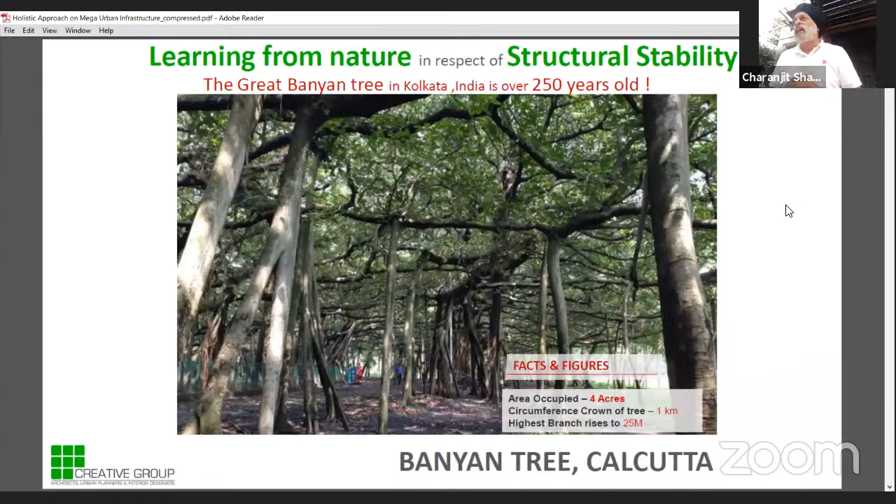Next, can you put the next one? We need to learn from nature - everything is in nature. Unless I do the adoration with nature, love with nature, understand nature, human psychology has to rotate around nature. You see the structure, the banyan tree in Calcutta, which is also integrating the structure - the beam, the philosophy of the structure is totally clear in this. Next. So this is now, respect my resources.

Today, sadly, I have to respect my water, air, earth, sun. Most things are now getting polluted. Why? We have air pollution, water pollution, all these pollutions coming, and that is what we call industrial growth, or development. Perhaps that is what is happening. We need to be conscious about that.

So now, this is mostly what we are doing. We are moving from fossil to solar to nuclear to many more things put together. This also has to be seen in terms of how we conserve energy.

It has to go into the nerves of the people, and we understand and act according to that, so that we are conscious about our community, our open spaces, our community spaces, our public spaces.

This is perhaps Chennai Airport, which won the global competition. We had Gensler as our partners from USA, and we were given the domestic terminal. Then we actually went into the site, investigated everything, dug out areas and created a place for the international terminal. Perhaps all of you must know that earlier there was no space for international.

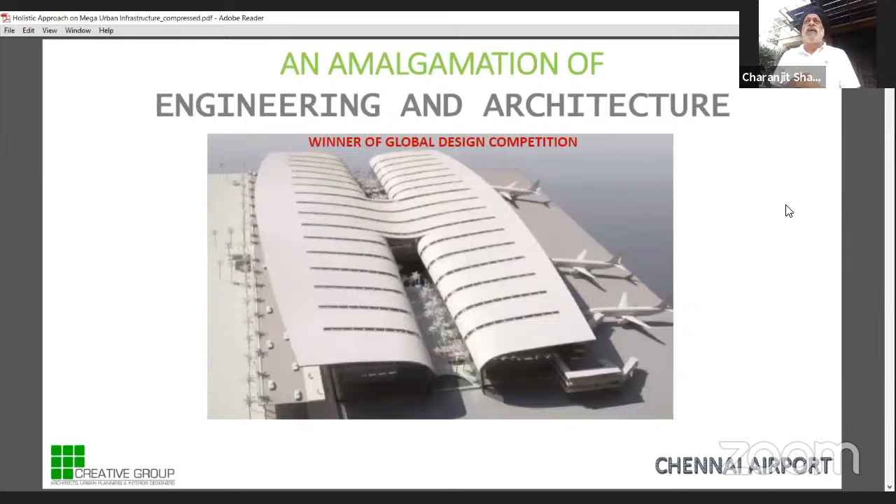We manipulated the whole site in a very intelligent manner and did that. This is how architects are very ambitious in terms of form, and perhaps we want the best form. We were inspired by the bird. We said, okay, let it be like a bird's wing. So we thought, yes, we make an airport terminal as wings of the bird.

So now, once you visualize a form, you need to contemplate what type of function, how to befit the function. Does the form come first or the function come first? No, the form and the function both complement each other, supplement each other, and your mental computer starts rotating, evolving the form and befitting the function.

This is how contemplating through and thinking of a very mega project as a very symbolic, iconic, sustainable, and innovative design. These are the ambitious things every architect, designer, planner would go for, and that is what we tried here.

So this is basically how, today, I'll only stress upon the passive ways of green architecture, sustainable architecture. How do you shape and size the building? How do you really orient the building? How do you place the building? How do you see that you maximize daylight and minimize heat gain into the building?

Besides other innovations, besides other active ways of sensors, automations, mechanical ways, variable drives, and I may call many more engineering terms - and then I say green, no.

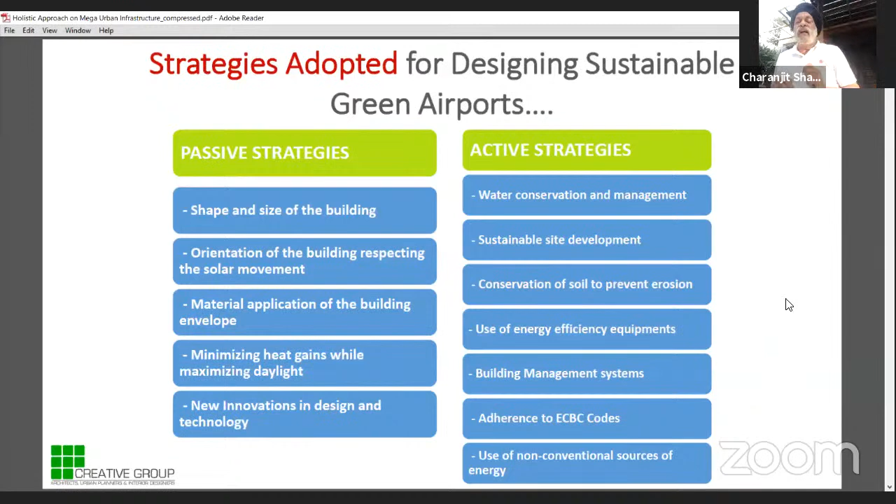These are some of the very innovative features in Chennai. We have the largest cantilever in the world in any airport building, 80 feet, which is 24 meters. And we were the first to bend a 508 half-meter pipe, 16mm thick, in Chennai - that technology was not there before. We also have steam-cured box section precast concrete girders, a technology brought for the first time. I'm happy to share that we can always have global intervention in terms of new technology, but it should not overpower my design philosophy.

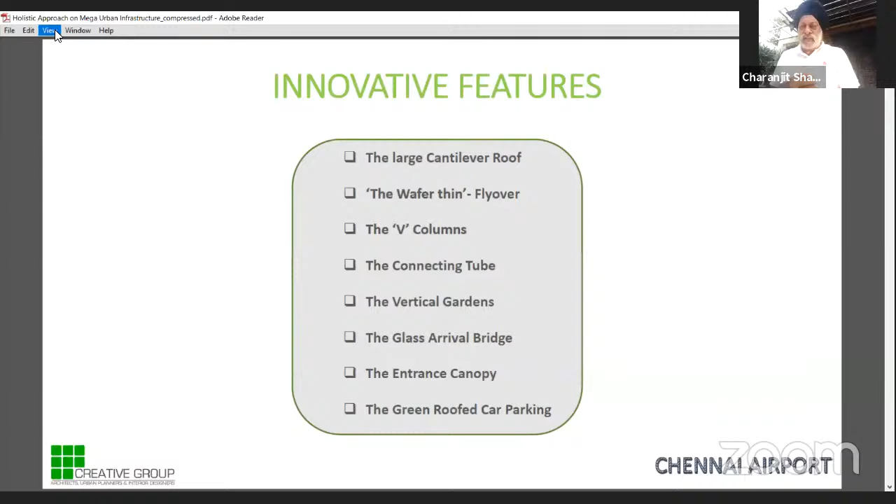This is how we started playing with the design, like an H-shaped building. We tried to see how variables worked in the plan, how the sun is moving - it's a north-south placement. On the air side, the back side, where you see the aerobridges, is the north, with a shade of about 12 meters. In the front, which is south and southwest, there's a cantilever of 24 meters. This is how the sun is cut, giving me a north-south face and a shaded south face to get glare-free light in the terminal.

When this was inaugurated by the Honorable President at 6:30 in the evening, there was no light on in the terminal building - it's an all-day-lit terminal building. This is how we planned it physically so that I conserve energy rather than just putting some glass facade to cut the heated sun. But by cutting the heated sun with shading devices, that is most appropriate.

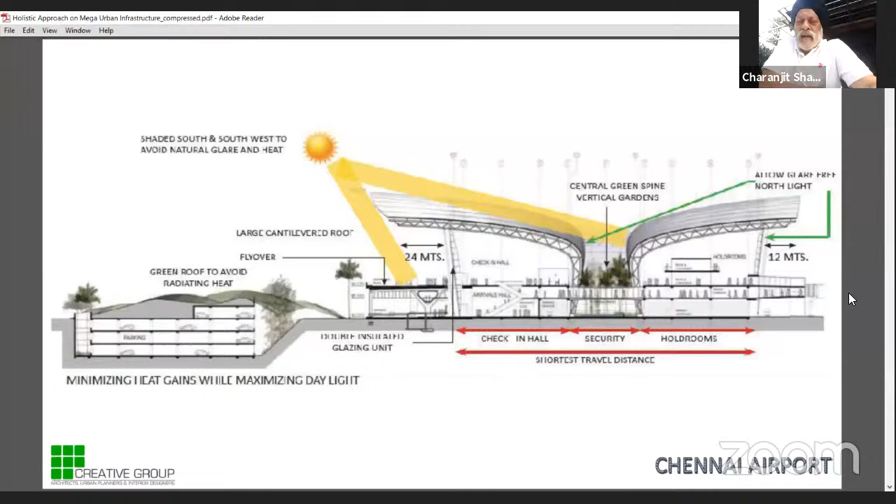This is how we have the vertical gardens in between, and this H-shaped cut gives me one surface here, another surface on the other side, and practically 4 surfaces, then two surfaces for my north and south light. The plate size on one side is about 30 meters, so I get 15 meters from each side of daylight, and it's an absolutely day-lit terminal building.

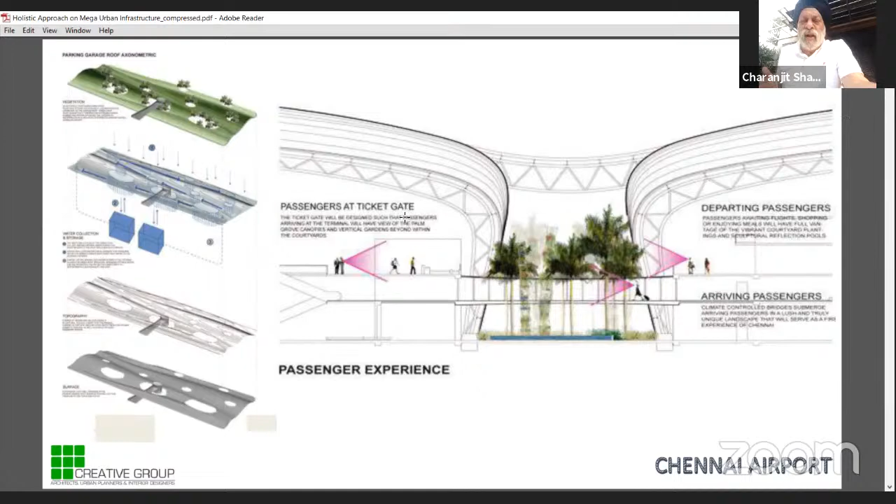This is how we have this arrival tube, so that once I come from the air syndrome, I come to this, I see from the glass on both sides the green, and I am grounded, I am with the green, and my air syndrome is finished.

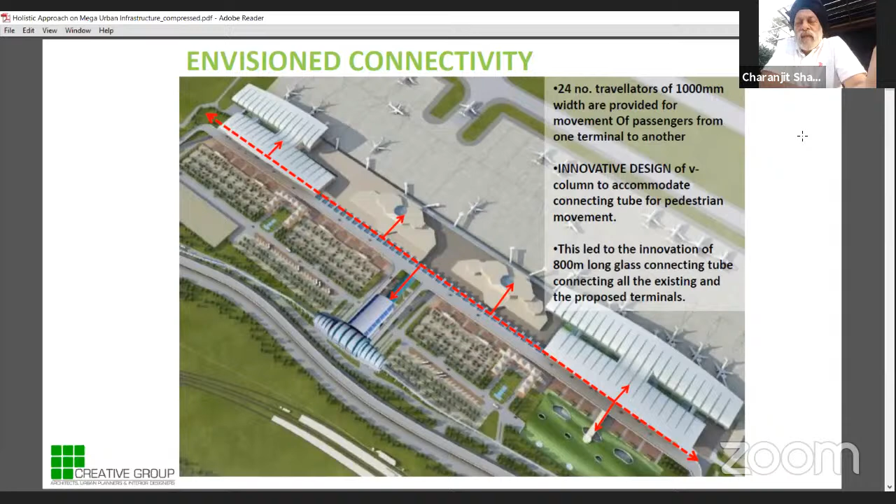This is how there is no place. The airport is practically abutting the highway, and the elevated road we have made in a manner that it is like 2 layers.

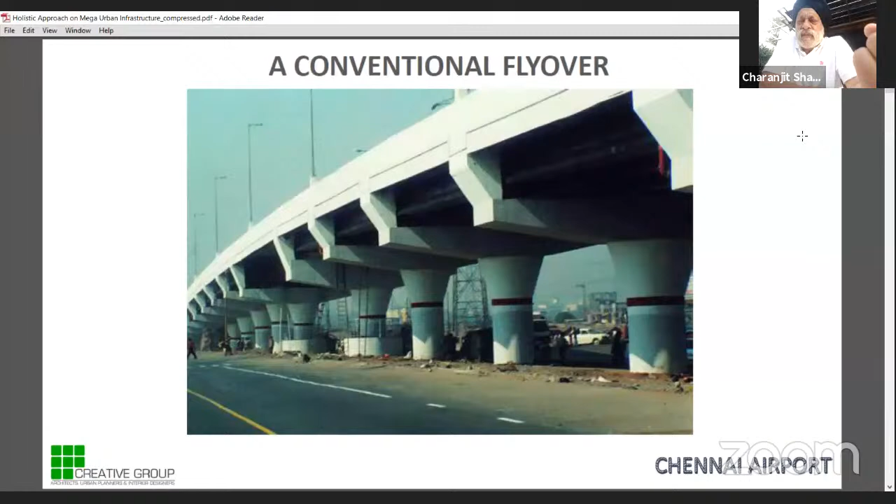This is the V column which we practically innovated. In this V column, we have inserted a glass tube which connects the domestic and international terminal to the metro, to the surface, and to the railway station, which is about 2.5 kilometers all over, and it has about 40 travelators.

This is now under construction. I'm talking about these box section girders.

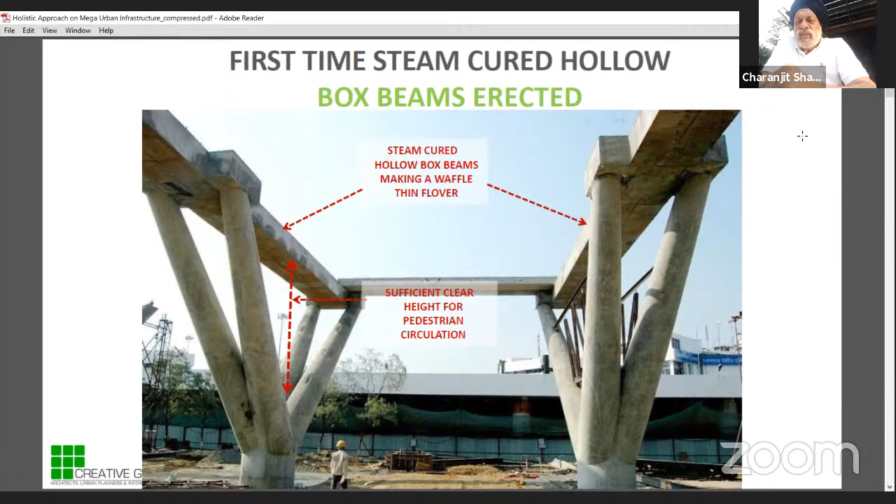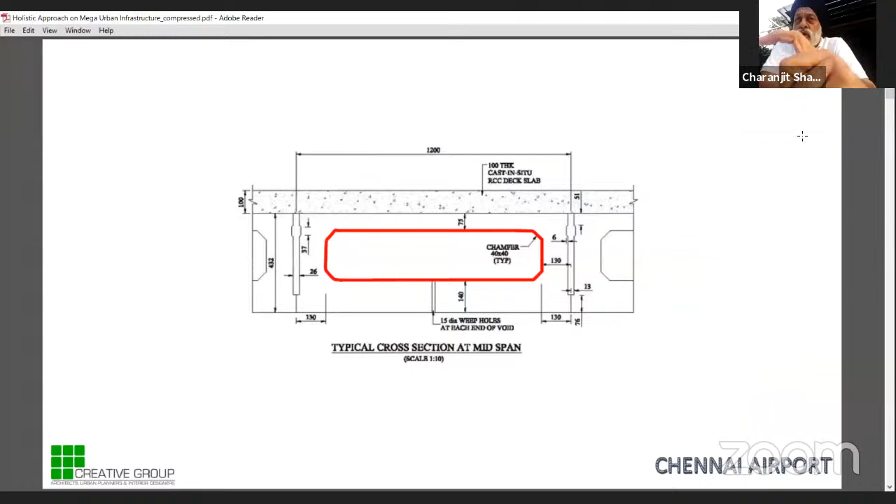The construction was very, very difficult. These are the steam cured box section girders, hollow from inside, waffle thin, just about 80 thick waffle precast steam cured girders, which we innovated and put here to gain more height below the elevated road, to insert another layer, which is a link to my other walkable space, for the pedestrian to move around.

So this is how the V column and the vocabulary of the V column is over. This is the section, I will not go into more details, I have many more things to discuss with you.

This is the V column, inserting the steel tube in between.

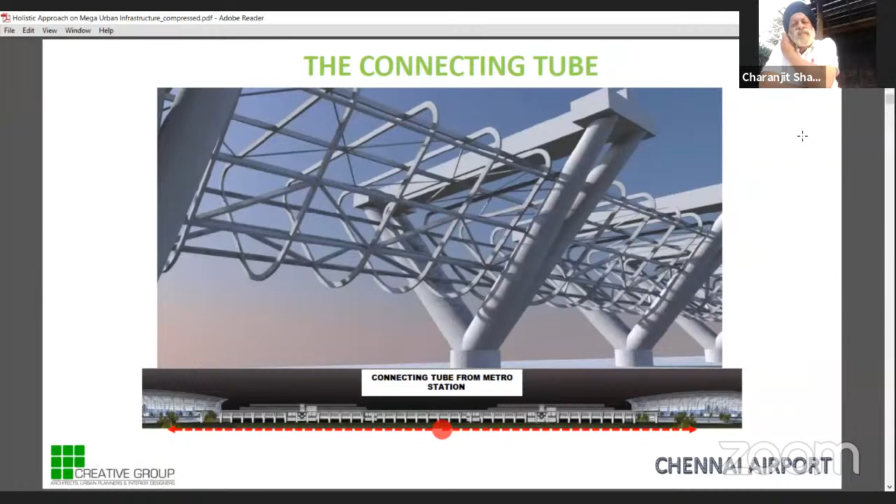This is how, most of you must be aware of, the glass tube works.

This is you as an architect, this is how the tube works. As an architect, you have to really dig out areas of no areas. So today is the time when either we use the skyscape, you have the upper level surfaces where you generate, or you go underground. How do you see that the ground is left for pedestrian movement and for the green?

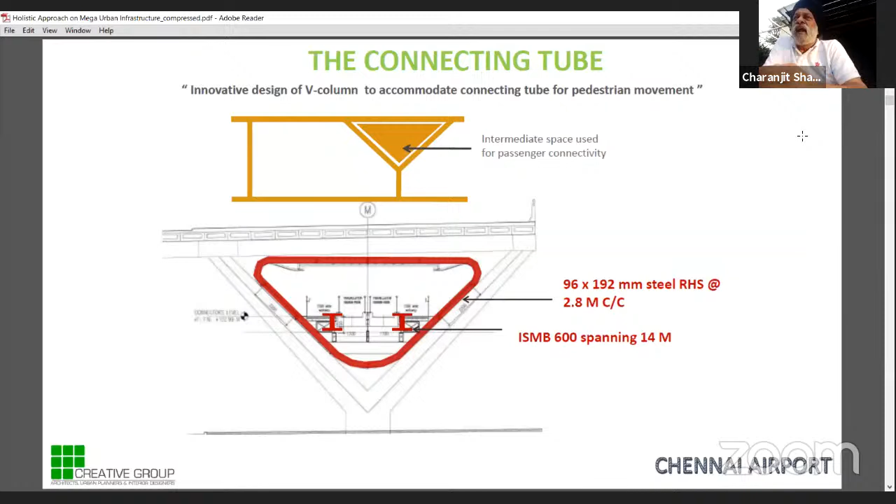This is the glass tube, and this is how it is continued. And this is again a glass tube.

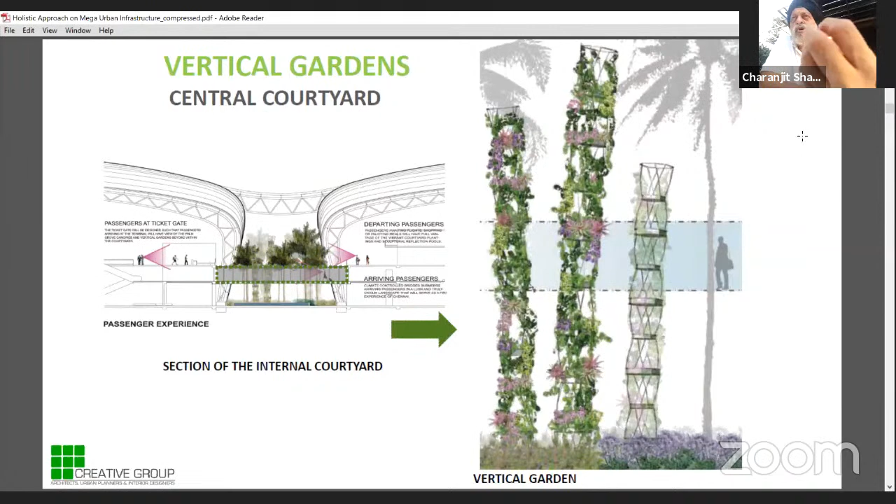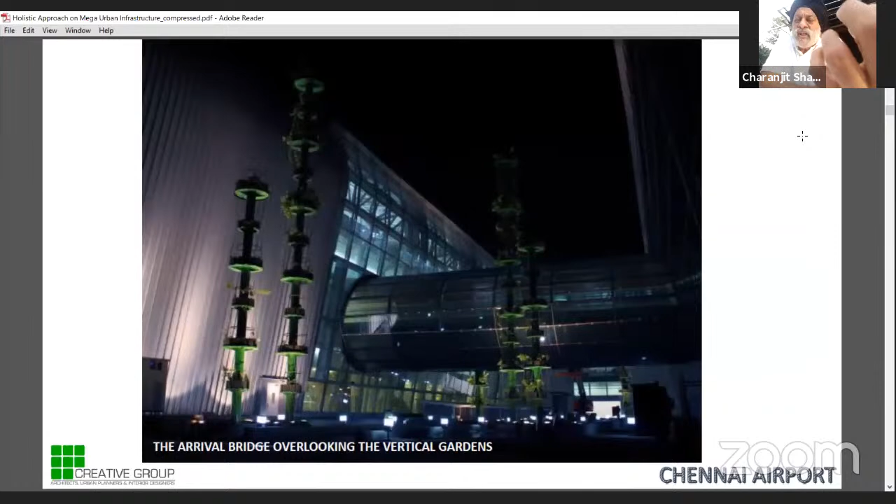I'm just trying to showcase how in large projects these are some of the features which predominantly become your thought process. How do you generate that? How do you create that sort of urban fabric where you get fascinated, you are also with nature, you're doing innovation, you're also sustainable. And we proudly say that once we do this, we do not say that there's an energy guzzler. We try to see that we consume the minimum energy.

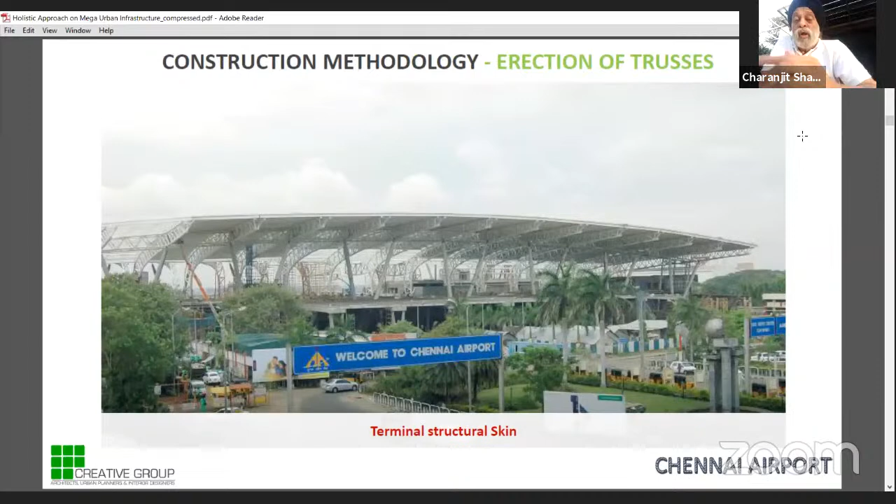This is under construction, various things, the brownfield airport, all these things were there. This was a very dynamic structure, very difficult to really put all these things together. We did most of the things off site.

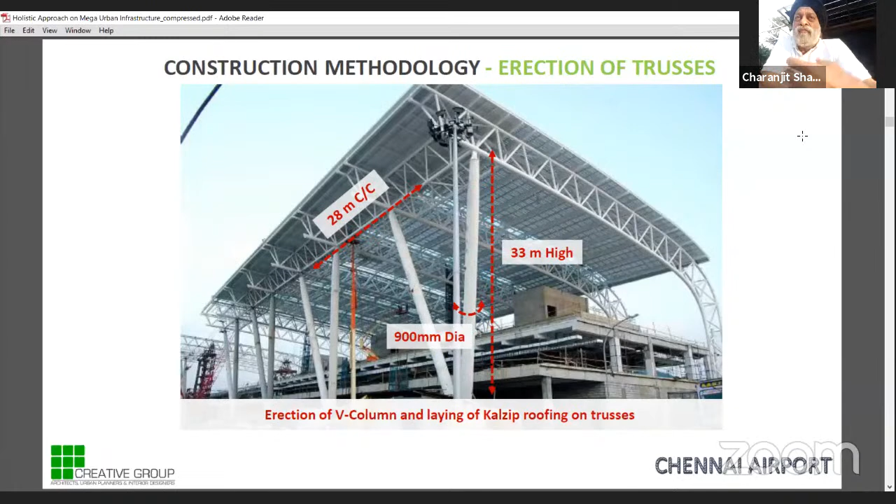This is how these V columns were inserted. They are about 33 meters high structures, without any base on the ground. Everything, the airport was in total functionality. This is how these things were done.

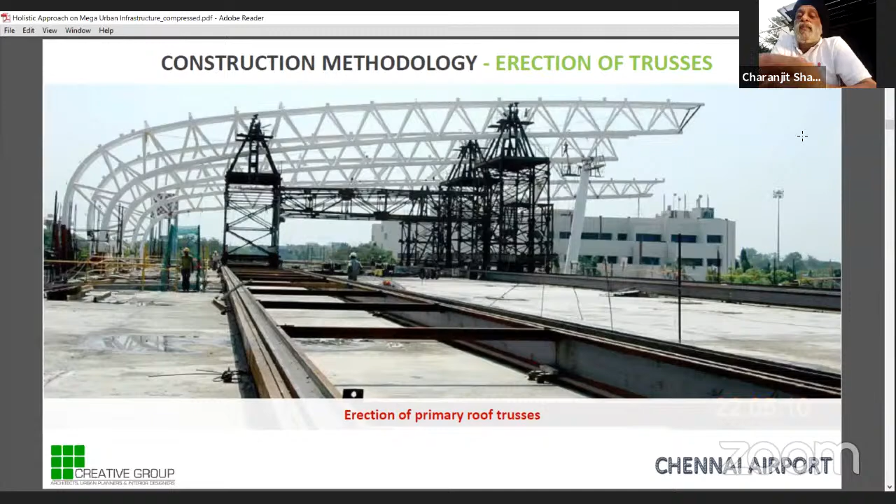Everything needs to be very precise and methodological. We have to understand the methodology of construction and erection—how the erection of trusses on a slab has to be done. We have to make a place for the complete girders where all the cranes move, pivoted systems, with multiple girder systems. This method of erection is very important because you're working at height with a large span structure.

This is how it looks. This is the half-meter pipe, 16 thick, bent for the first time in India, and we could do it. This is something we are proud of.

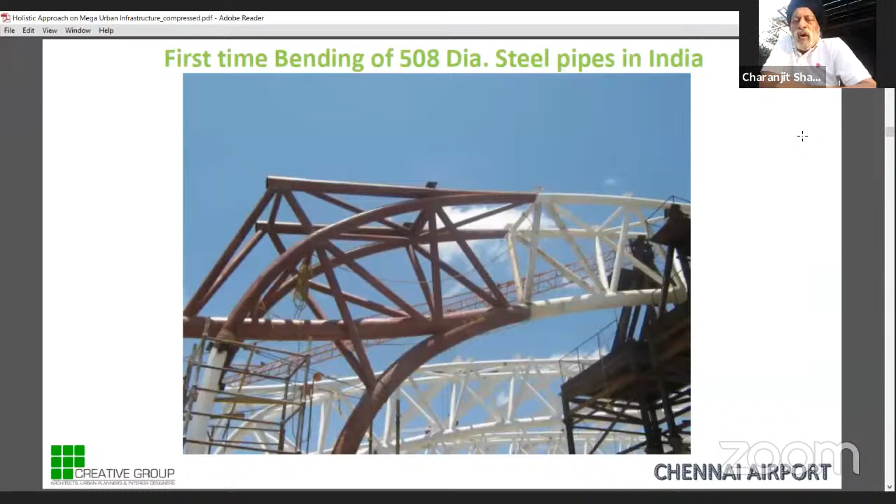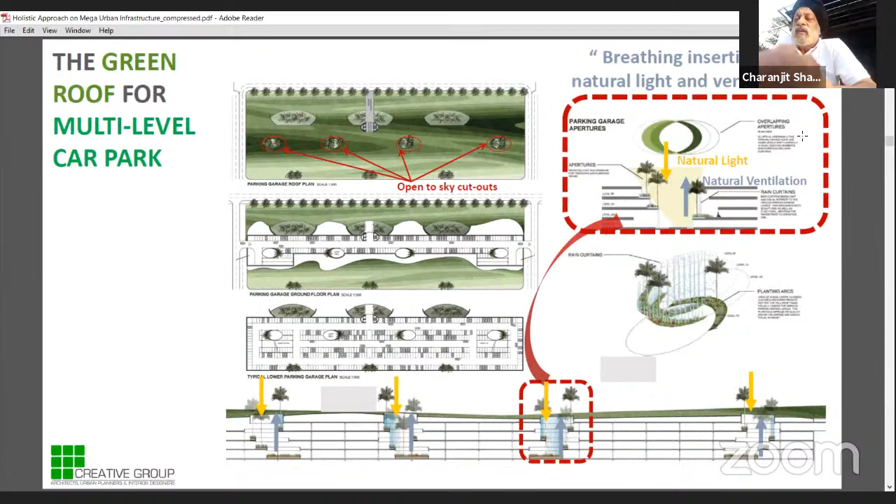This is the multi-level car park, which is not yet constructed, but we wanted to have a green roof on top, with a large cutout so that even in the third basement you get daylight.

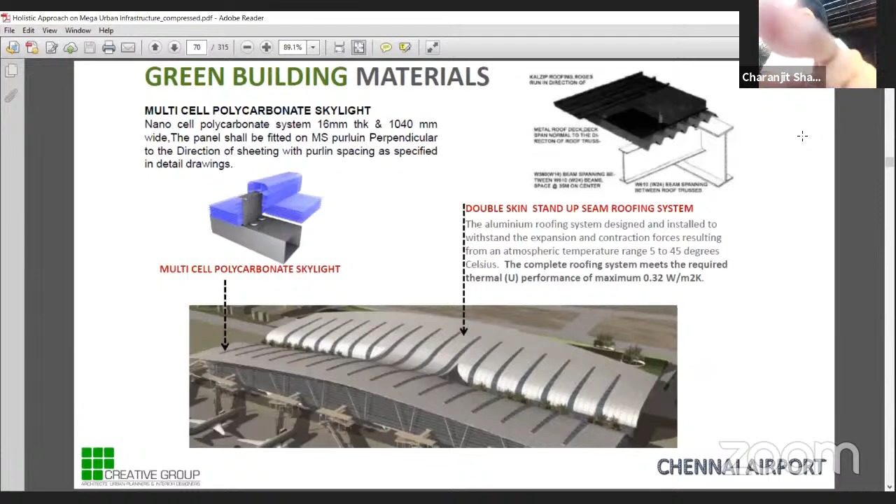We use grass paver blocks and propose to have all these green materials. We propose to have a car park like this.

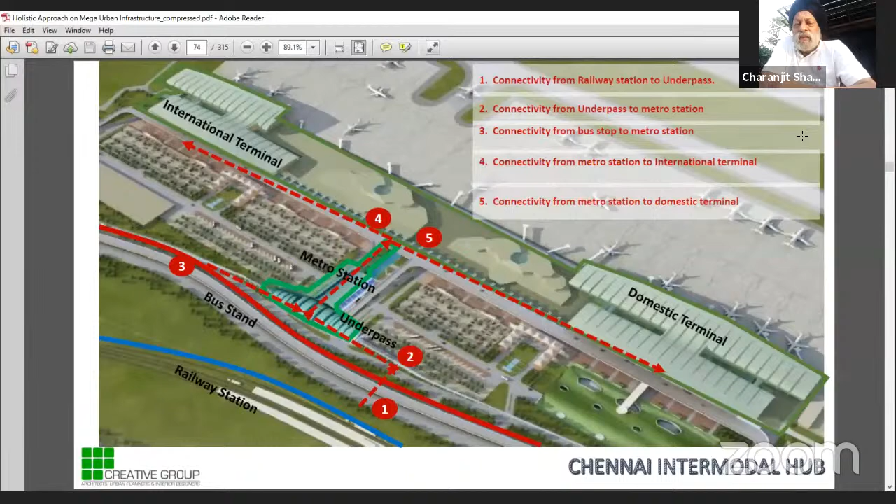Intermodality—I've already expressed that four modes of transport are interconnected. This is the intermodality from the metro station to the terminal building, and then the connectivity.

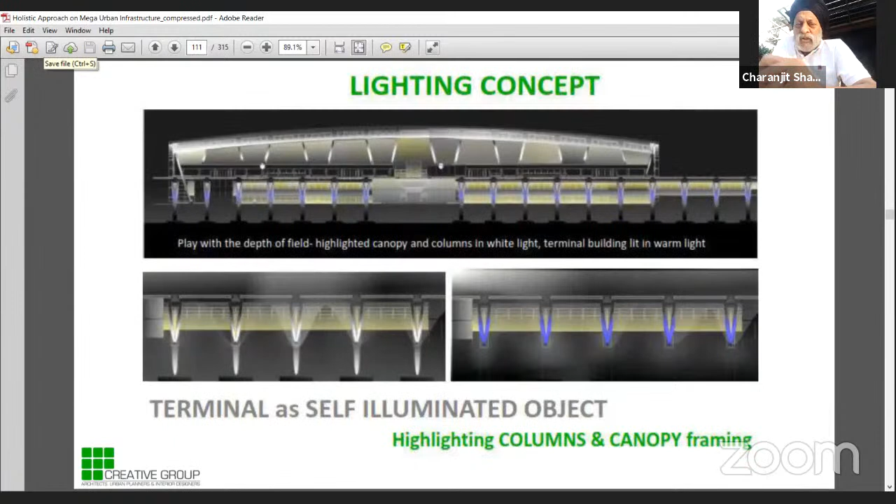I think we can skip these service plans and come to the Raipur airport. You can go through this quickly, because I don't want to waste time—this can be more subjective in some other discussions.

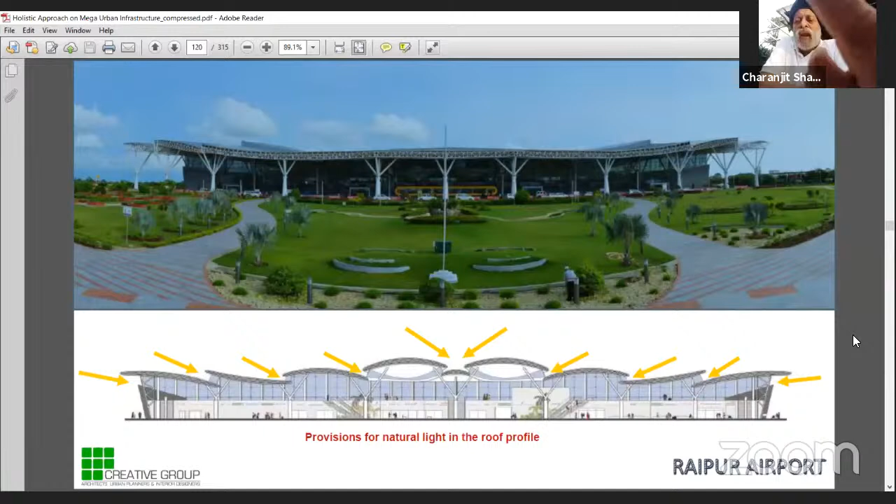This is a very interesting, fascinating airport—very complex, something very dynamic—and again this is all daylight. These are all green airports where we talk about energy conservation, water resource management, recycling, STP, lakes—everything put together. And see the complexity of the structure. When talking about steel projects and steel works, one has to have the dynamism to understand every component.

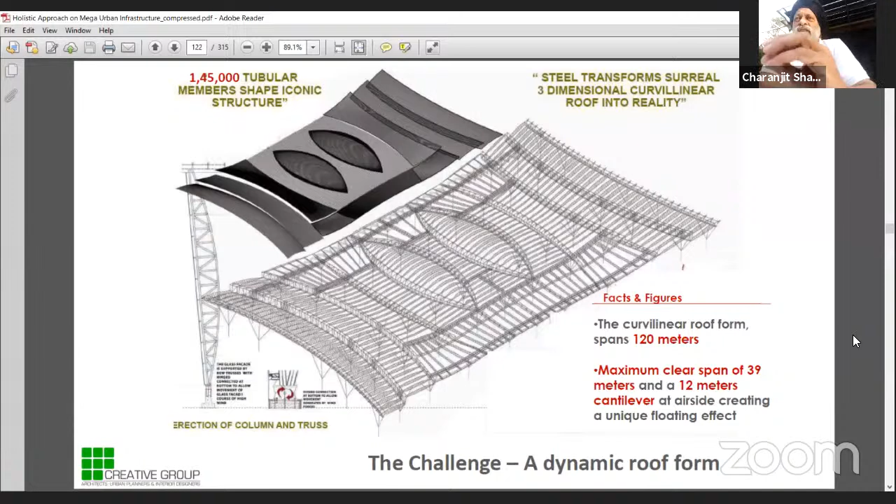Today's technology allows us to simulate. We make each and every item of the structure through computerized measurement. This is how things are done precisely in our drawings and execution, so both complement each other because the physical touch is not there—it's all computerized. This is how the complexity of the roof is there.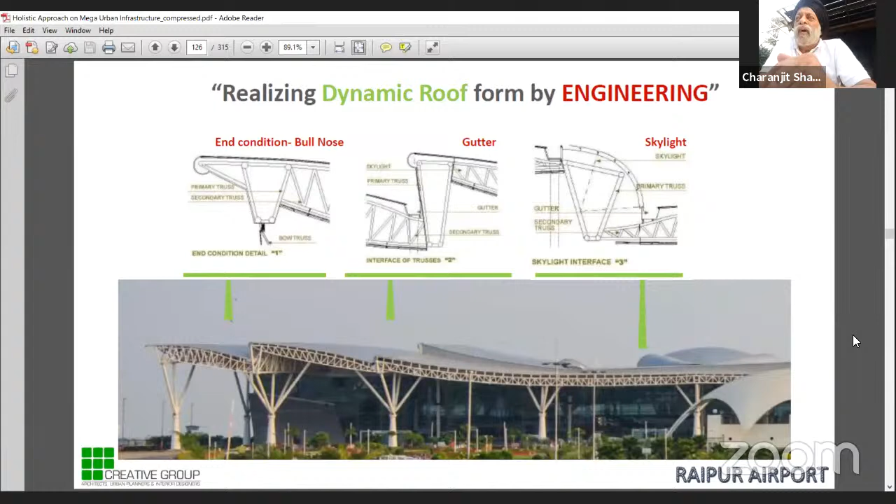We had a lot of issues and problems. Even the gutter—we have a double insulated roof. We tried to make the gutter double insulated so that if the outside temperature is 48 degrees and it rains, condensation won't drip inside and make people think the roof is leaking. So the architect has to go into the minutest detail.

These are the skylights and many more innovations.

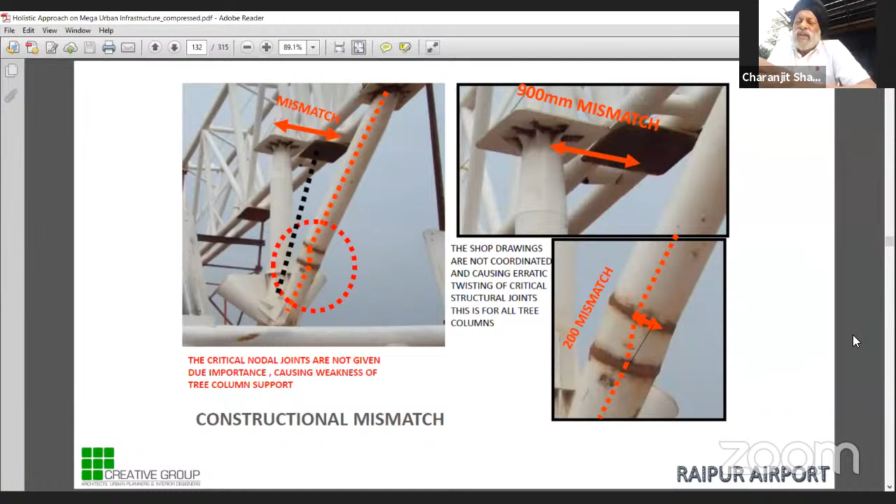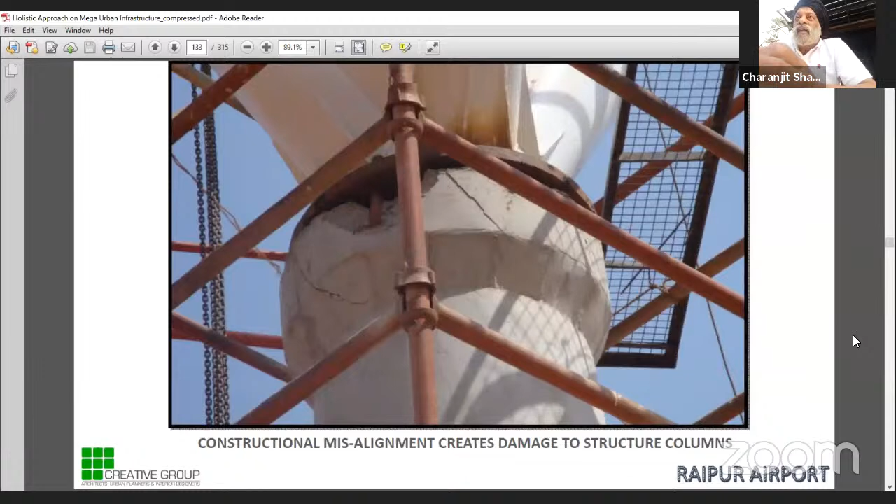This is how the erection was done. There were many other issues during construction—the column got broken. At the time of execution, when there are problems like the column breaking, we came to understand there were other issues too. So we had to tackle these mitigations of various things together in creating perfection.

This is how the inside space looks. This is the eye, and these are the three columns which we initiated.

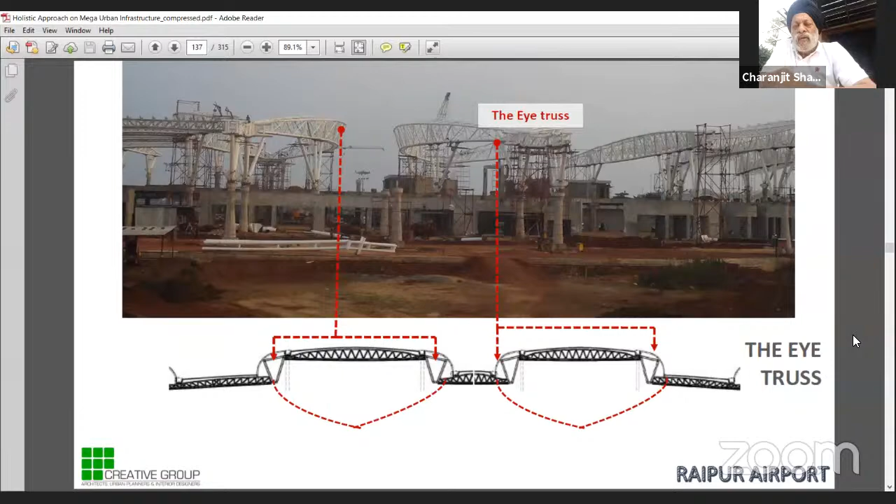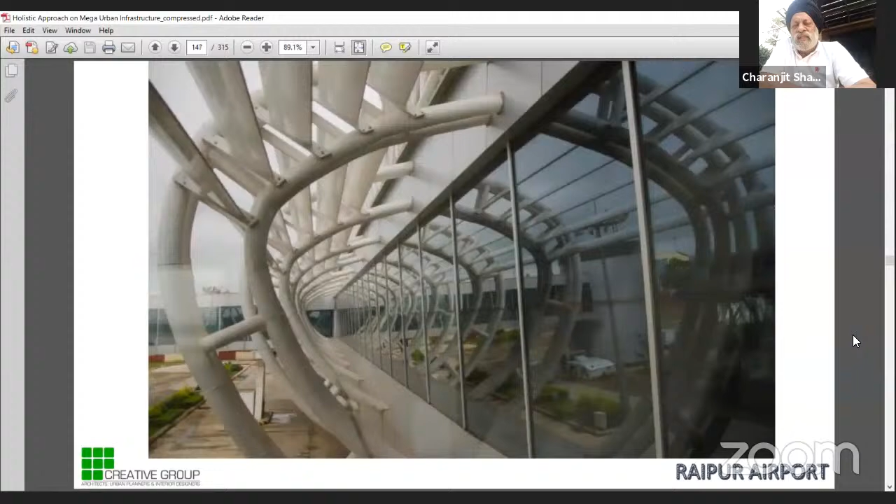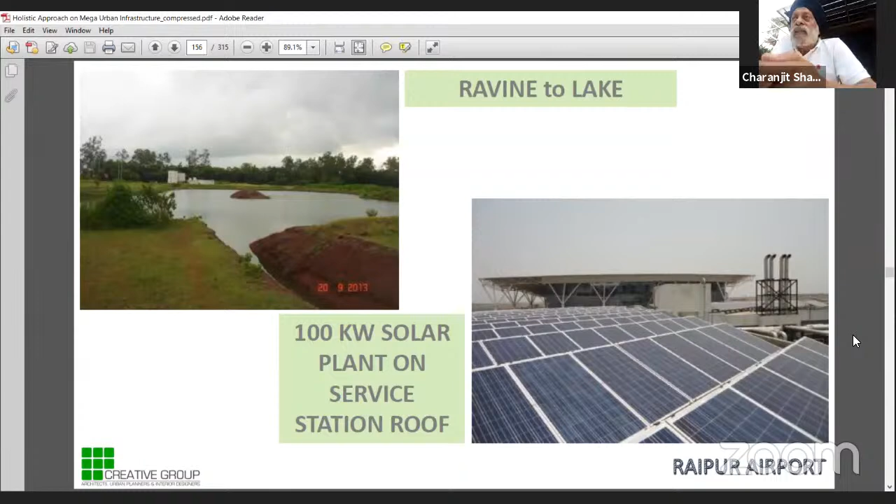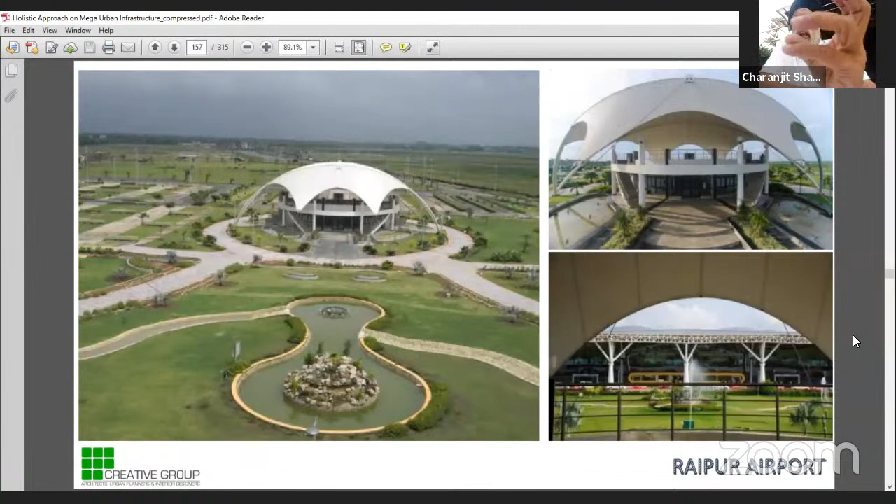This is what we created at Raipur—making a lake. I conserve all my stormwater into the lake and produce my energy from solar panels. So this is how our buildings are net zero, or if not beyond net zero, nearer to net zero. This is the landscape of the complete Raipur airport.

Next, this is Vadodara airport, again a gold star GRIHA rated airport—absolutely simplistic, dynamic airport, where you see this.

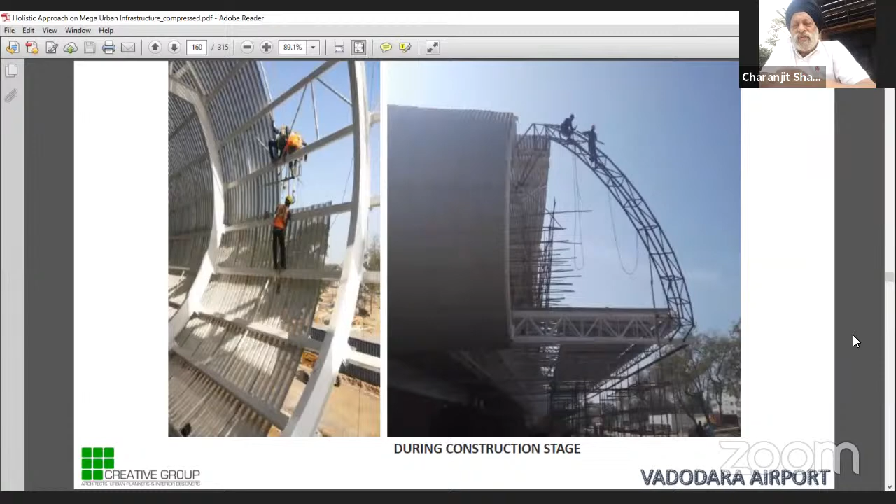The west and east sides are all blocked, and again we're getting light from the north and shaded south. This is how insulation of the roofing is done, and these are the interior spaces.

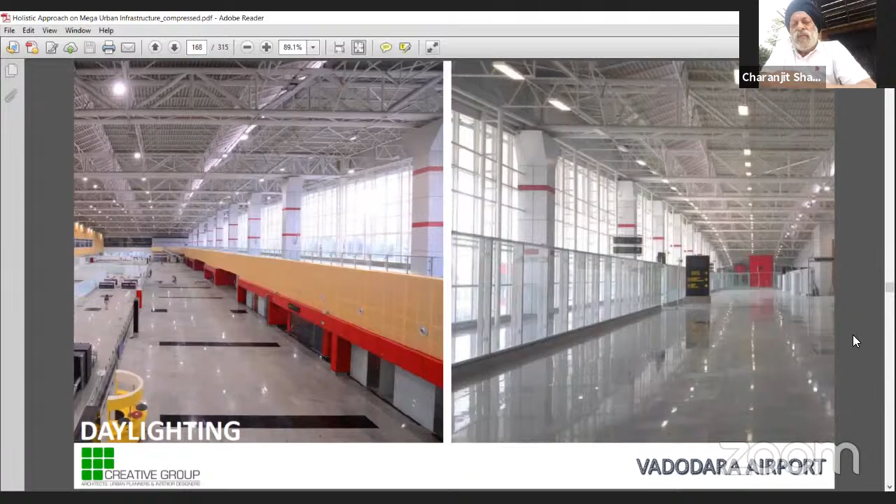This is the food court, with skylights brought into the large projects. Again the skylights in the interiors. Reminder, this is without any false ceiling.

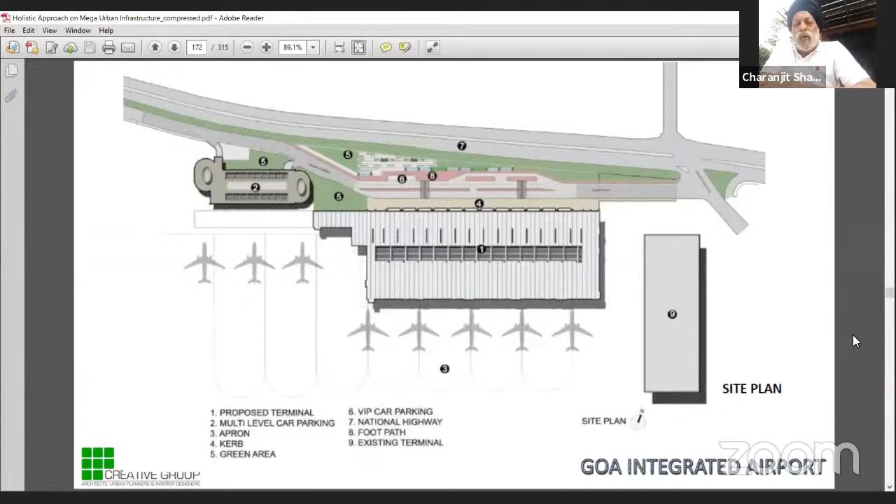Yeah, yeah, yes, this is Goa Airport. I think you can please skip over it, just show it and I'll keep on speaking. This again is a folded plate structure.

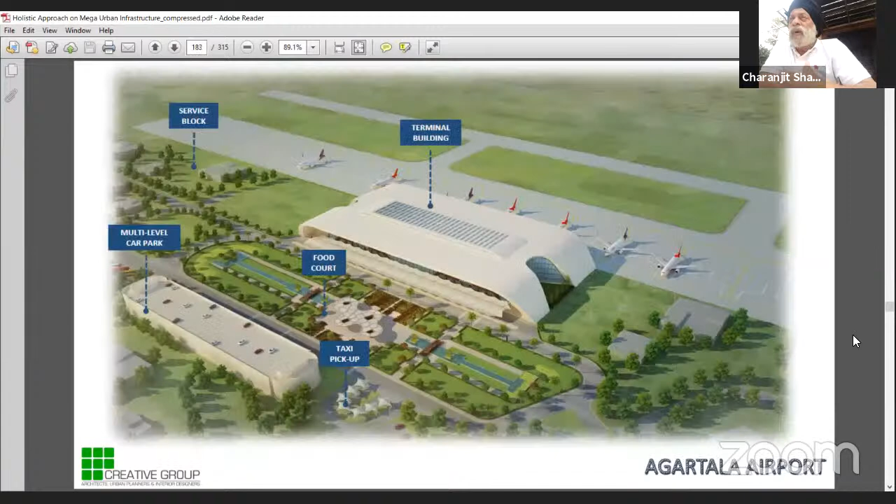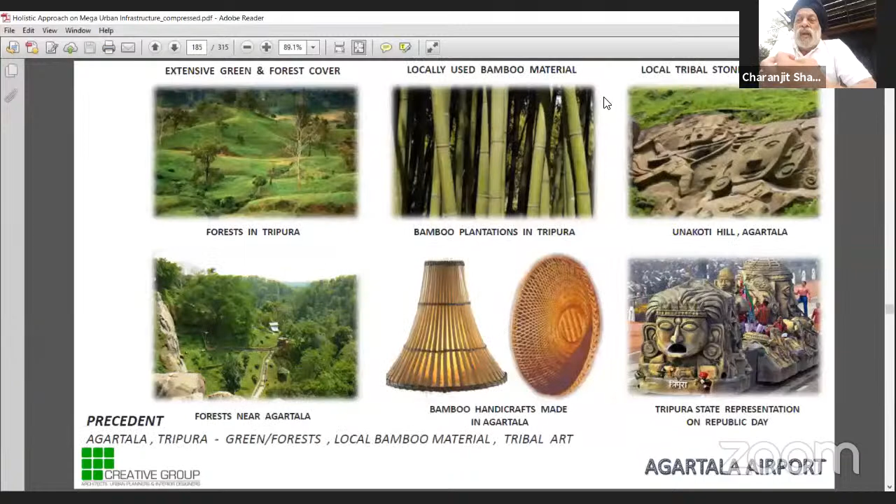In steel, we have to do many more things together—maybe tubular, folded plate, or a space frame. Many more technologies are there where we can do it. Holistic architecture means we need to understand other elements of applied architecture in totality, so that an architect can integrate engineering innovation as an architectural vocabulary. We've expressed this in a simplistic, dynamic way at Agartala Airport with bamboo architecture.

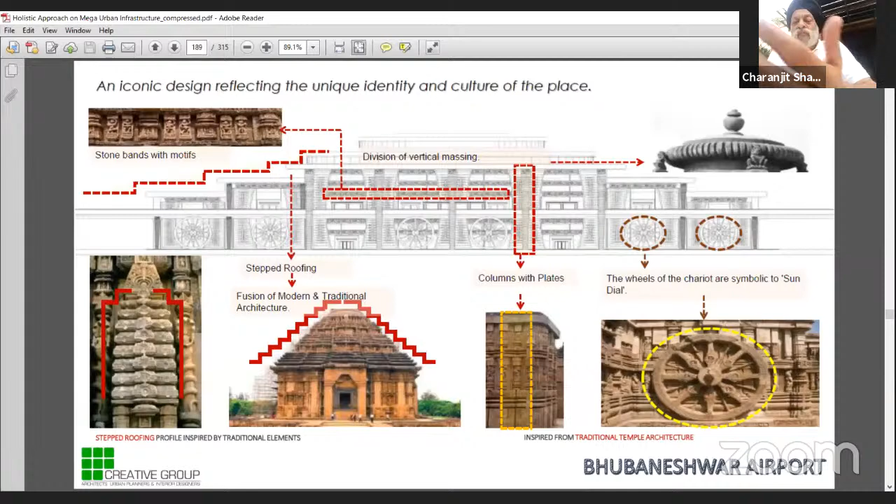This is the interior again, bamboo, green, at Bhubaneshwar Airport. It's like putting emotions into it, like a Jagannath chariot.

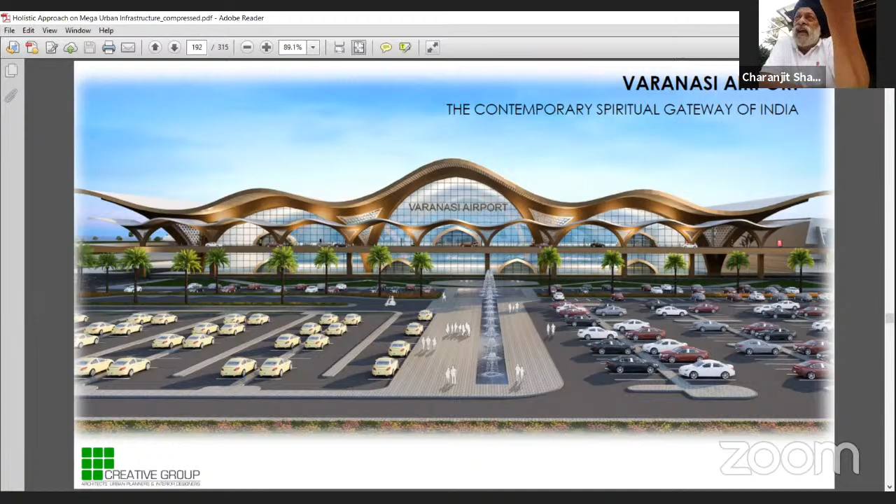We wanted to showcase here that this is Varanasi Airport, where it reflects the flow of river Ganges. That is the expression of the place, a sense of belongingness, and then the structure gets breathing, it gets life into it, and it becomes lively. This is Varanasi—you see these boats and the interior design.

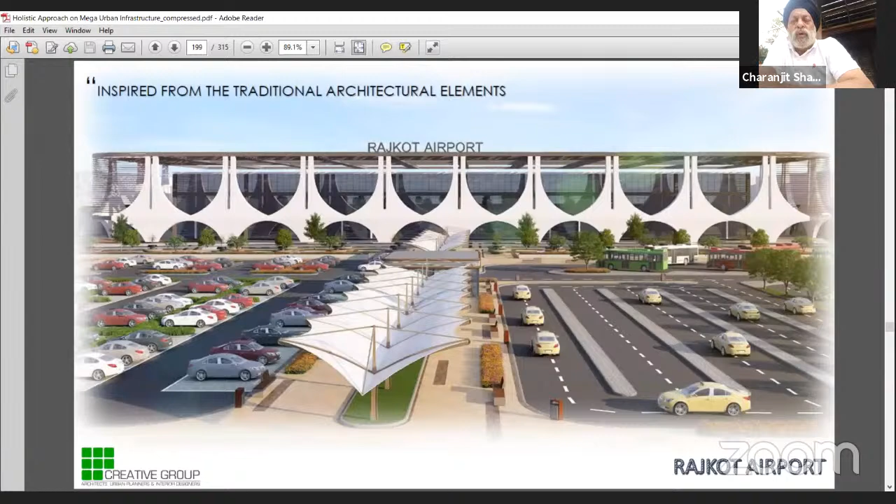Then we work on BIM altogether for Rajkot Airport. Today is the time when all modulation has to be in BIM, with layering of all MEP work, structure work—everything has to be in BIM.

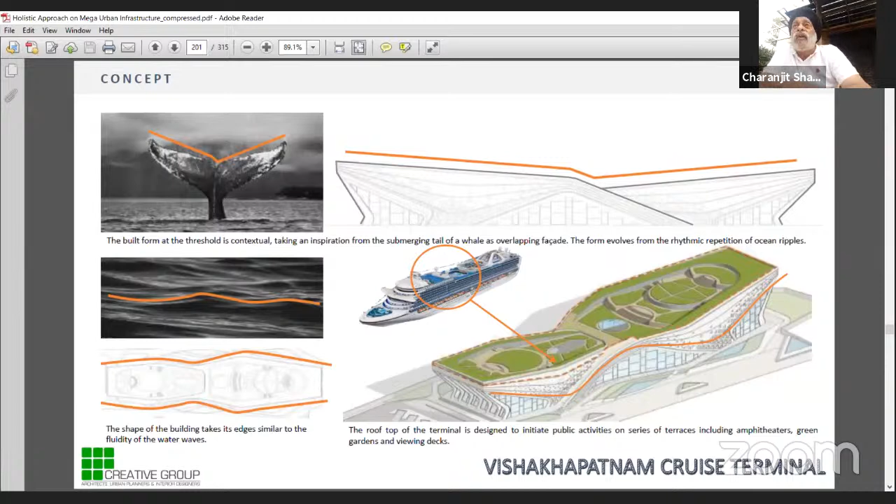We are into waterways, airways, railways—all these transportation systems, including bus depots. This is a ferry terminal in Visakhapatnam. We have developed this for the waterways as a cruise terminal. The cruise is going to be docked here, and this is the building we are making in Vizag.

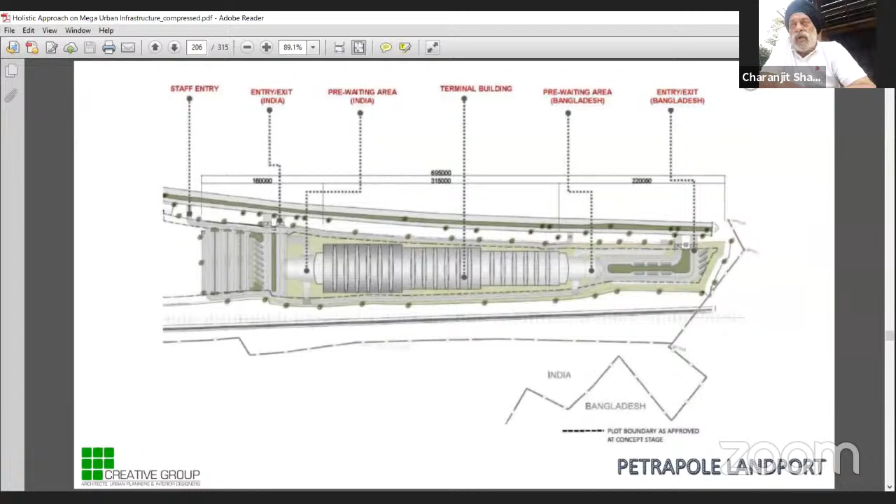This is a land port we are doing at the Bangladesh border. This work is under construction, with Shapoorji Pallonji as the contractor. It's about a 500 crore project, a linear development for people coming by rail and by road.

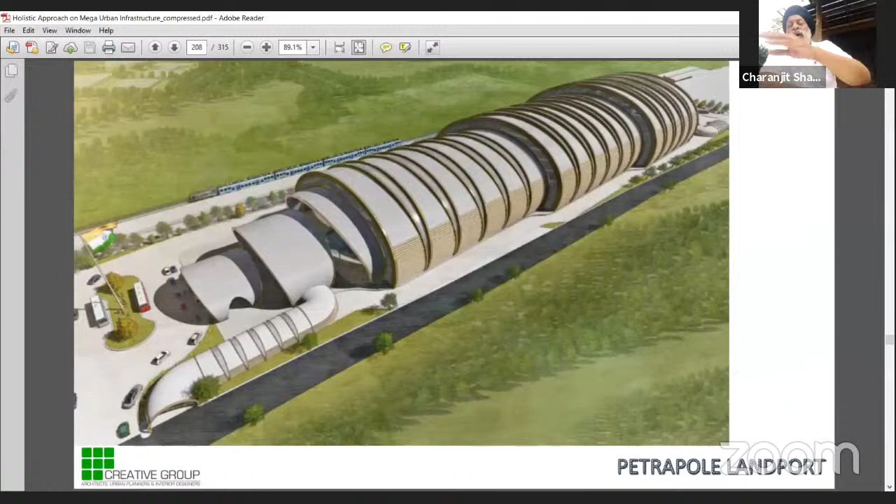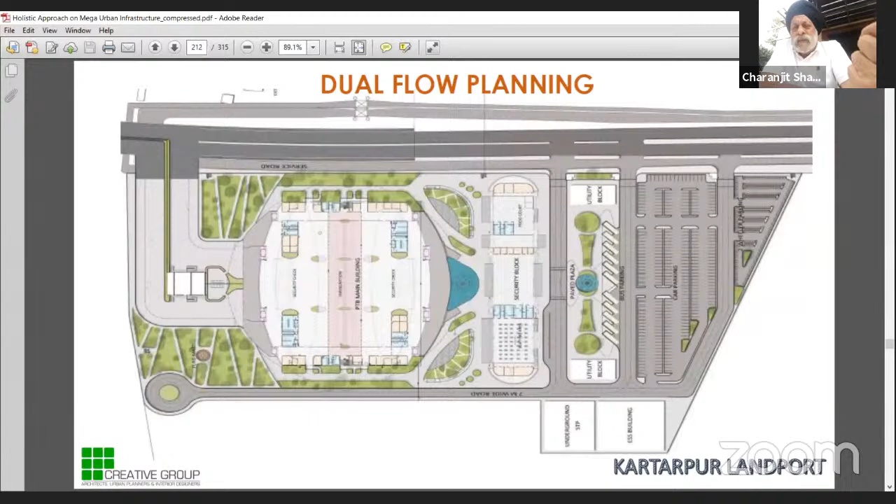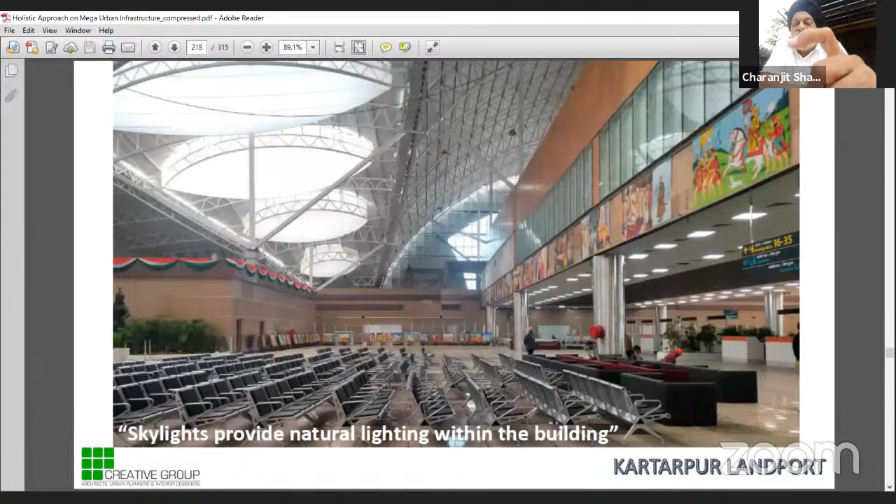This is how it was done—a 400 crore project completed in just 4 months' time. It's a magic, achieved with the contractor, the owner, and the architect clubbing together.

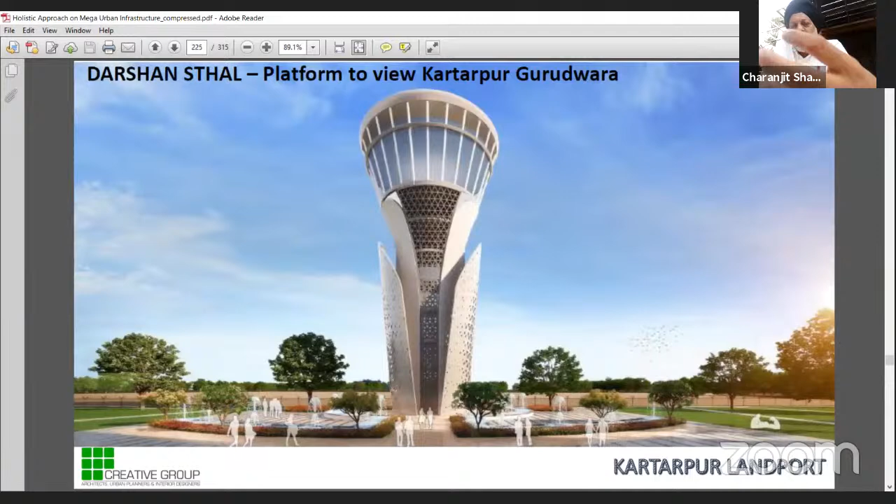The touch of emotions has to be there in the building as well. This is a viewing tower with a rotating restaurant.

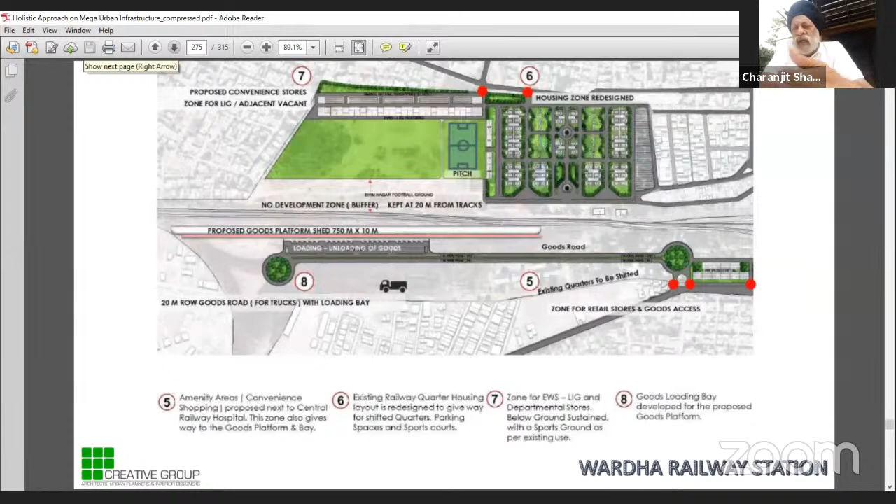We've done many railway stations now—Lucknow, Kota, Chennai, Wardha, Coimbatore, Ambala, Pune, and many more together. I am very happy that SRM students were also involved in the Chennai airport studies. This is the Coimbatore Airport railway station.

Today more than 200 railway stations are going to be revamped, and people say they'll even be better than the airports. This is what is happening at Coimbatore. Can you just go faster?

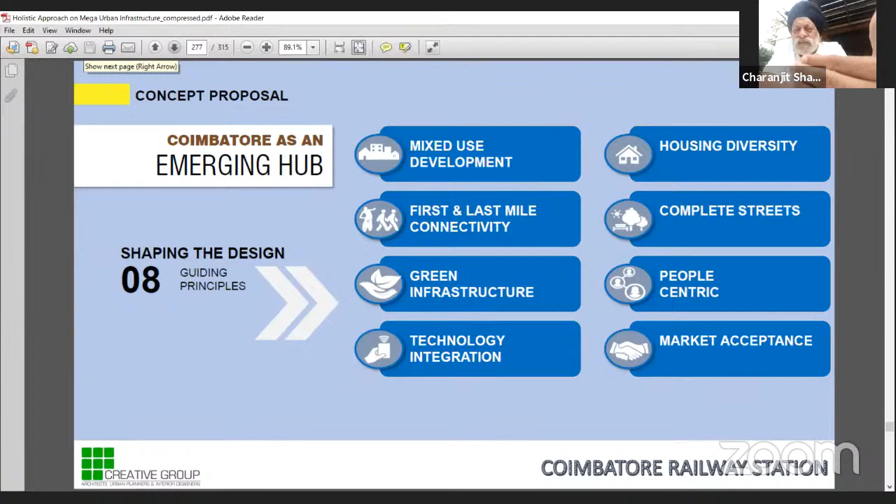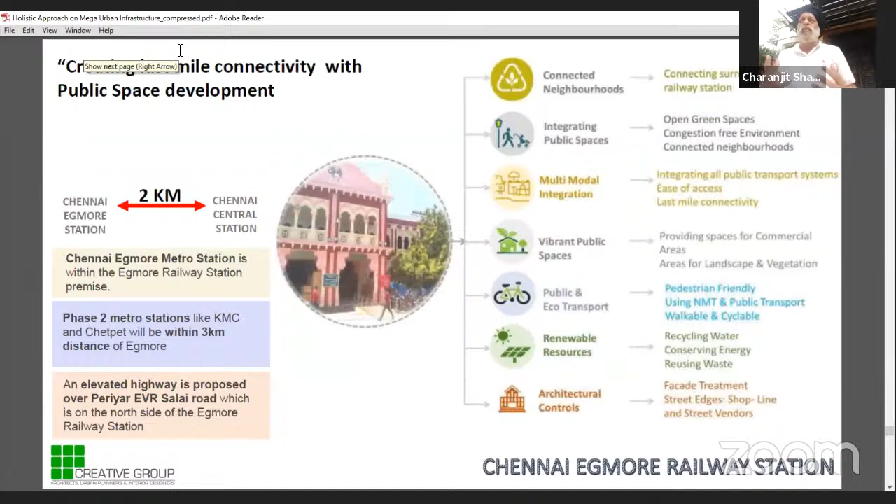I am just showcasing the students, not going into detail, but trying to show them the volume of the project, the intensity, the visualization, and how you foresee the architecture of tomorrow. Detailing can be understood in school, but how the scale and horizon of projects is changing has to be seen.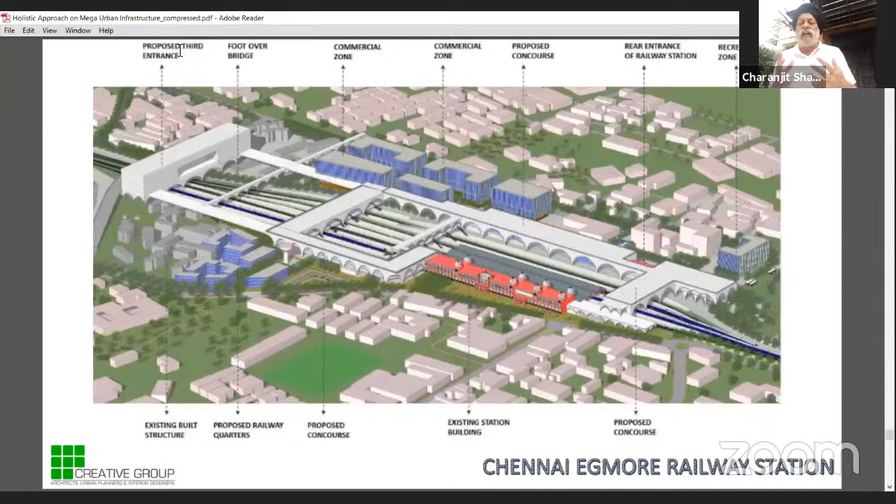So we are practically into mixed land use. These railway stations are a manifestation of many things put together, and they are probably coming into the PPP mode.

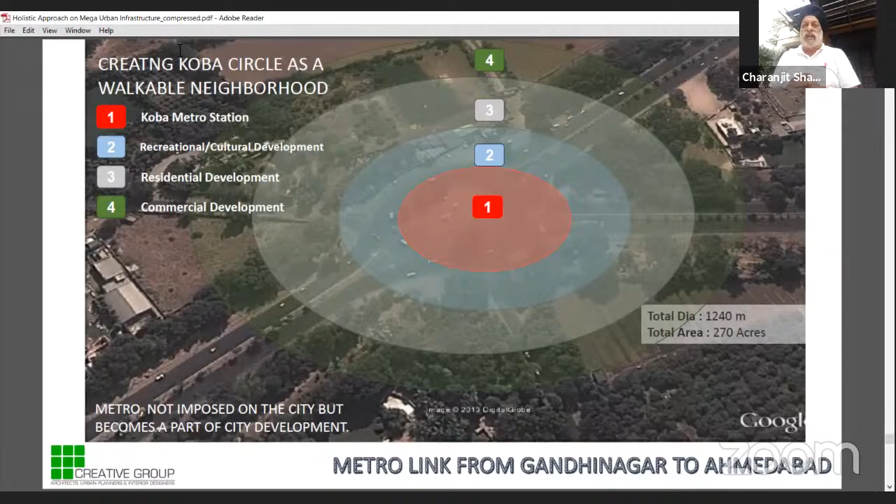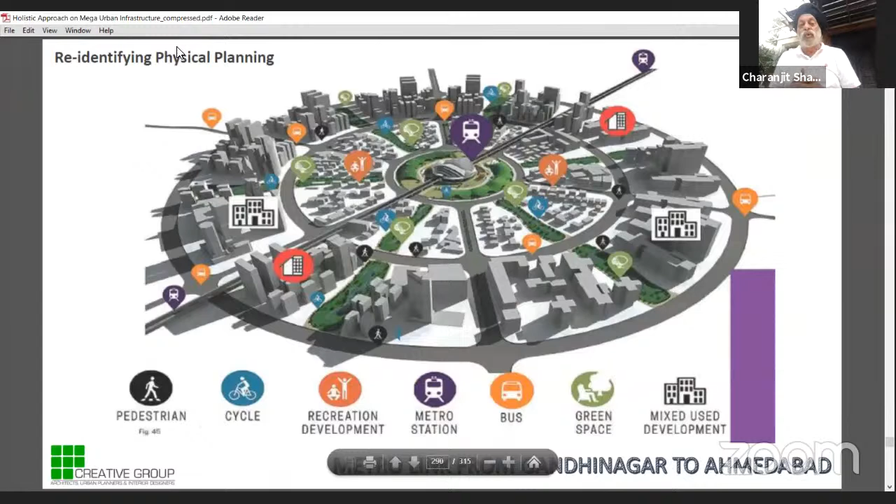We have also done the metro stations' intermodality studies for Gandhinagar and Ahmedabad, studying how to create metro stations as intermodal hubs—not inserting the metro within the city, but creating the city along the metro.

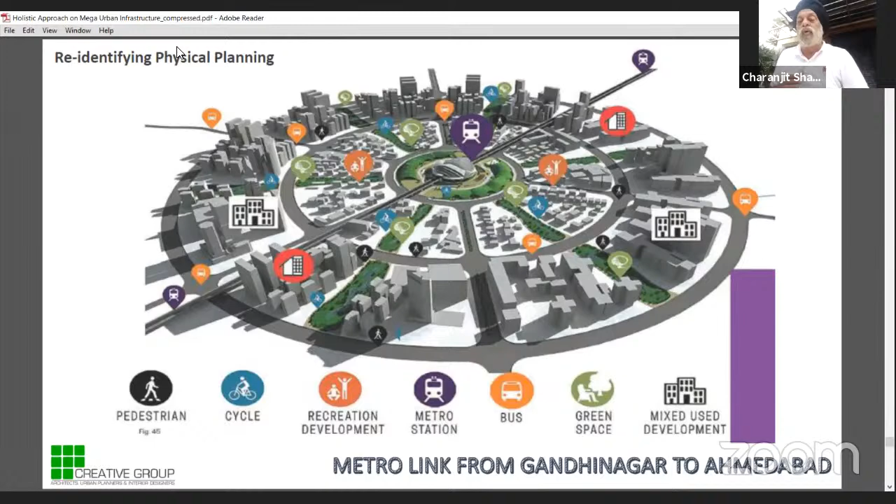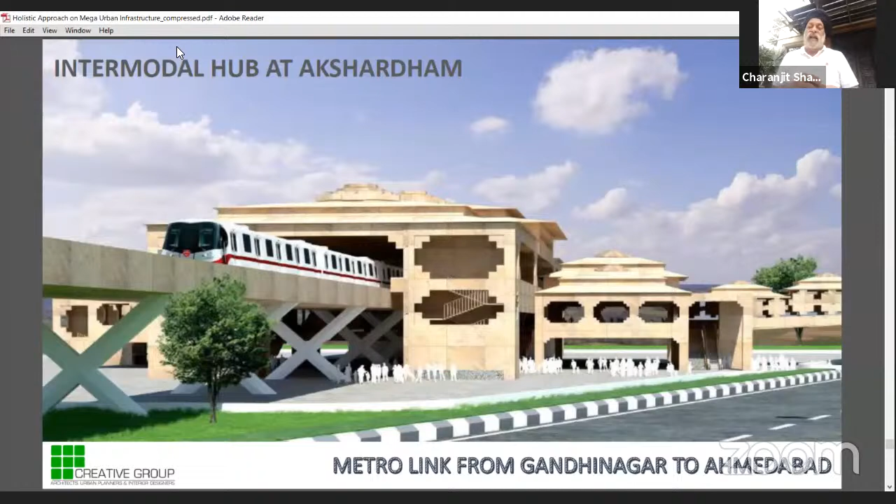This is how Koba Circle has been planned, with a metro in between, recreational areas and other areas around, mixed land use, creating a city within a vicinity of about 1.2 kilometers—making it walkable. These are the stations, like Akshardham station, which takes the vocabulary of temple architecture.

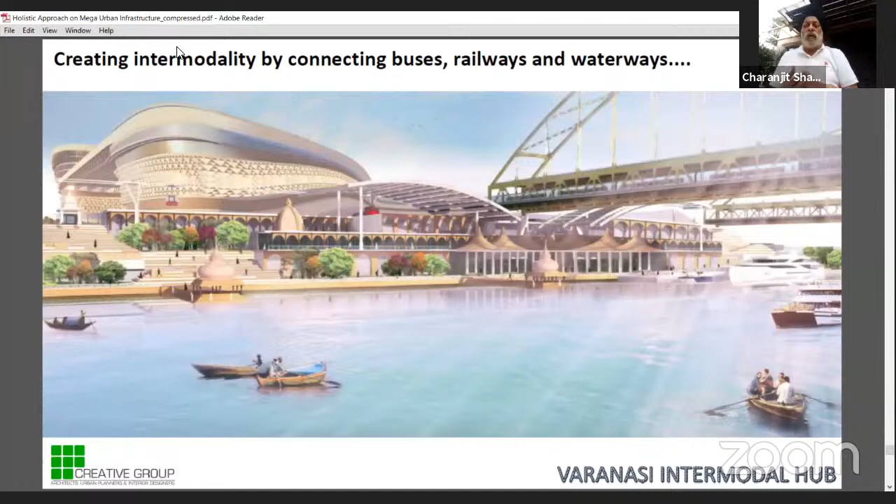So these are, you can just skip our Paldi, but this is very interesting - this is at Varanasi, where waterways, railways, metros, surface, all form an intermodal hub. We even have a helipad on top, everything in between. This is the architecture of tomorrow, where we're talking about intermodal hubs, because we need to move faster.

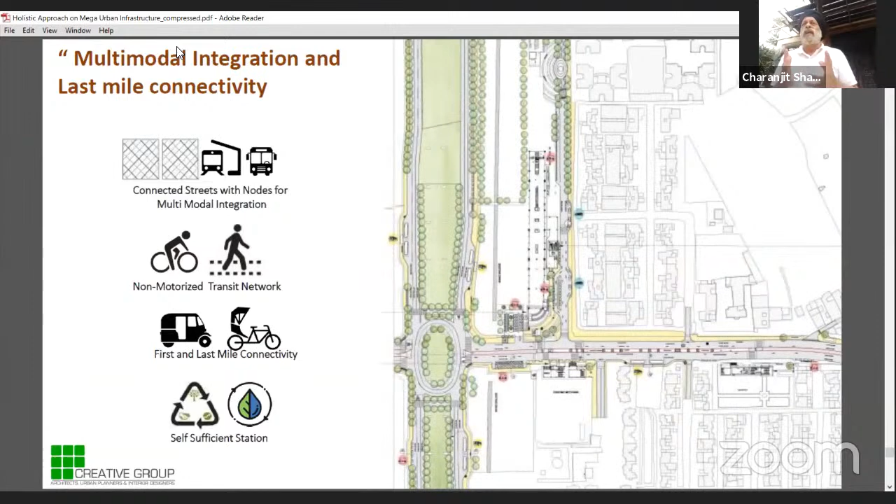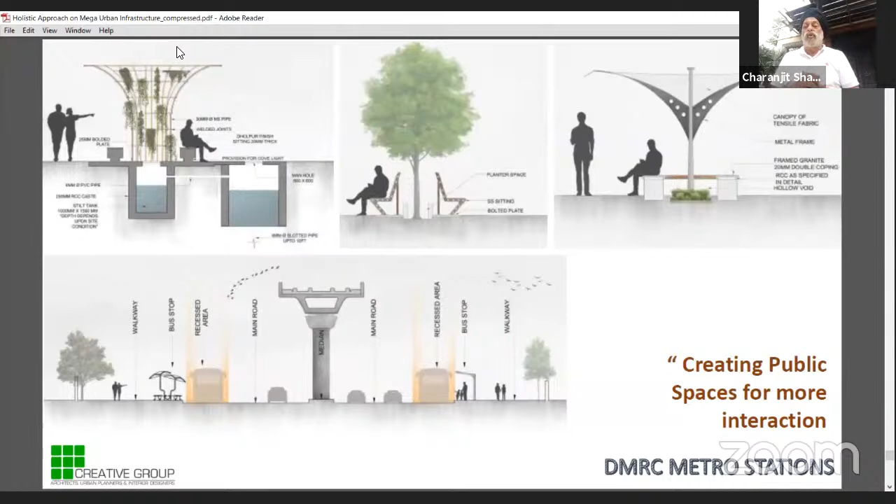Here I'm talking about multimodal details for about 40 stations at the DMRC in Delhi, where we're working on last mile connectivity from the metro to your house - how can you make it walkable, safe and secured? What are the various sitting systems, hawker management, lighting systems, so that even a woman can pass through at night at 2 o'clock, at 12 o'clock, very happily and peacefully.

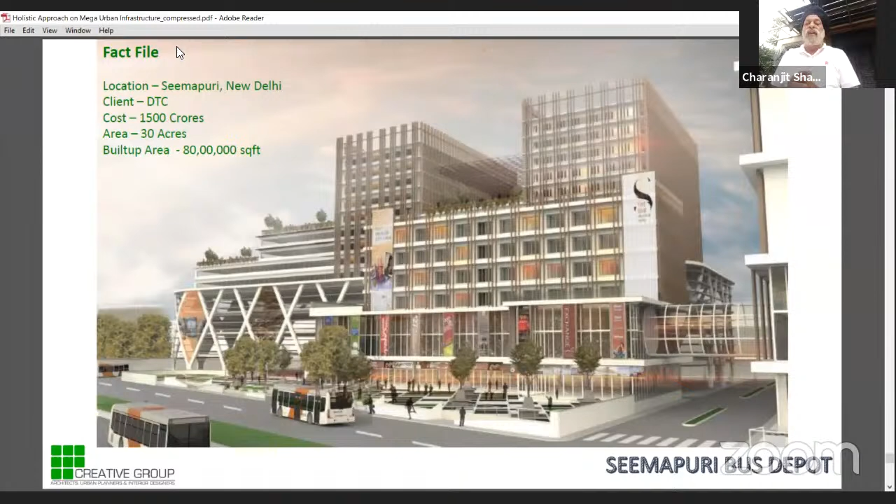My friend here, Mr. Vijay Garg, is along with me. This is what we planned for the Delhi government, even for the bus depot - how transit oriented development, TODs, can work, and we create places where we facilitate other community areas within those public areas, and also create spaces for intermodality.

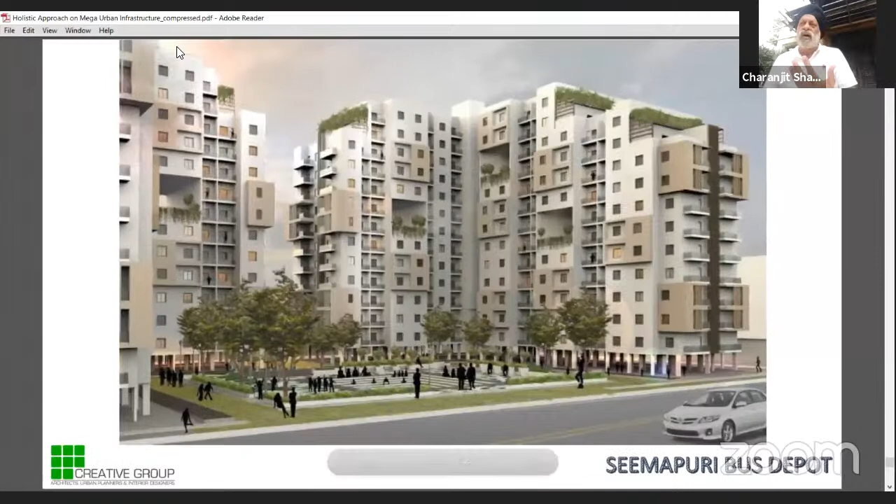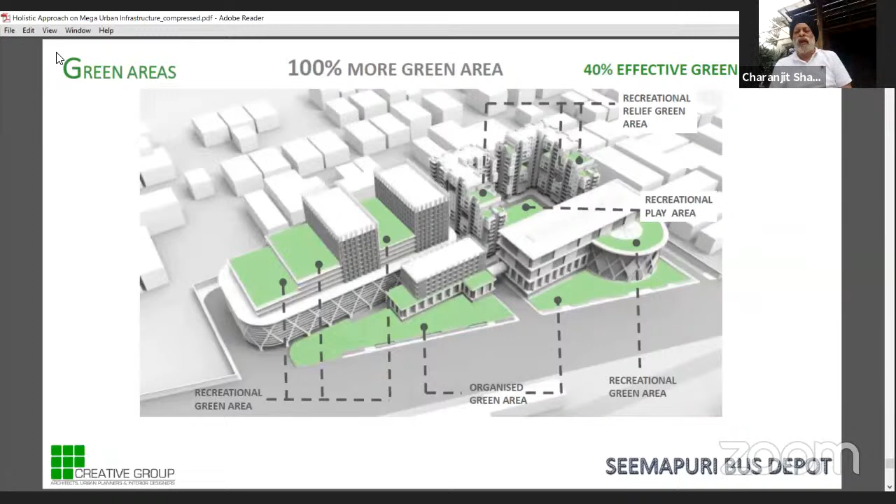So these are some of the projects which we are doing. Another project in Indore, where mixed land use is there, where transit oriented development is taking place. I am just showcasing this because the students should know that sky is the limit.

You have many things to do. India is very big - I don't have to really go out for a job in US or in London or Australia and New Zealand. This is the hub of work.

This is how my friend Dr. SS Bhatti attempted to call me, looking into my sustainable project, as 'Patrick Geddes of India,' and this compliment from an elite person like Dr. Bhatti, who's a triple doctorate, is a great honor to me as well.

Thank you. Now, this is how I got the Jewel of Punjab award, and some of the things which God has gifted me through the process of sincerity, honesty, dedication - it's the attitude of mind which has created the aptitude.

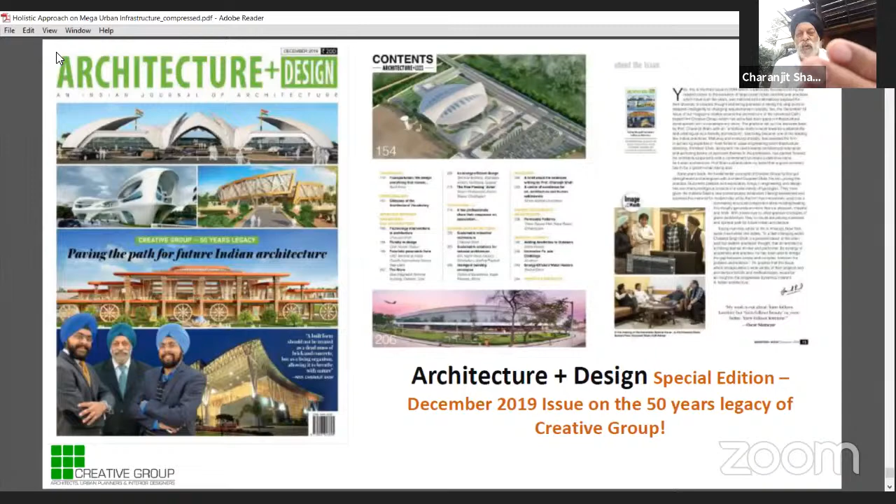And we are now very comfortably saying that we are a corporate and we are making the new India as a nation where we ambitiously look forward to creating beyond net zero. That is the architecture of tomorrow. Hopefully from various aspects of understanding, we'll be able to create that sort of architecture.

And this is what I generally say - our vision is nature is life, life is nature. Let's see that we love nature, we eat nature, we live with nature and proudly adore nature, in a manner that yes, I can breathe nature and I am not robotic, I am humane. Let me create an architecture which is humane and which has the dynamism of creating a holistic human architecture rather than a robotic and cosmetic architecture.

Let's make an organic architecture which grows with my functionality, with my aspiration, with my lifestyle, and with my socio-economic condition. Let me not copy the West and be robotic, and proudly say, 'Oh, I am global.' No - I need to address these issues.

I am really thankful to you all for listening to me. My submission to all you guys is this - it's a big horizon.

But today, it's an alarm to us that after COVID-19 and this virus, we have tested life. We started spending time with our own self. And once we get into the inner engineering, like Sadhguru Jaggi Vasudev says, it's inner engineering - once you are strong from inside, mentally, the physical environment, you will engulf it and be absolutely with it, and you love it, adore it.